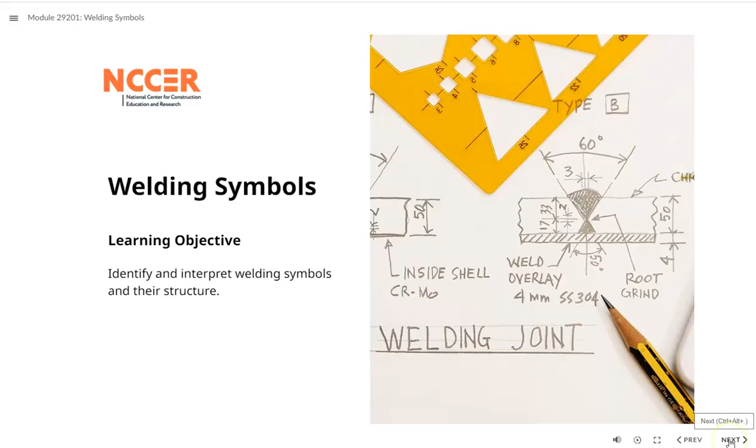Drawings and project specifications contain a variety of symbols that must be accurately interpreted by welders in order to meet the design specifications. The basis for interpreting these symbols is an understanding of welding symbol construction. First, it's important to understand the difference between a welding symbol and a weld symbol.

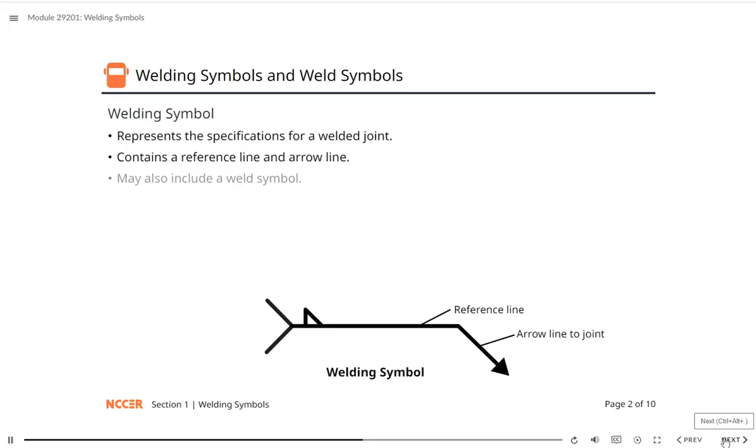A welding symbol, as shown here, is a symbol that represents the specifications for producing a welded joint. Notice the horizontal reference line with an arrow line at one end. The arrow line, which can be on either side of the reference line, points to the location of the weld. Many welding symbols will also include a weld symbol. A weld symbol indicates the weld type. It is connected to the reference line of the welding symbol.

The welding symbol also contains information on the size of the weld, as well as its surface finish. The tail of the welding symbol is where additional information about the weld can be found, such as the welding and cutting process, or which electrode type to use.

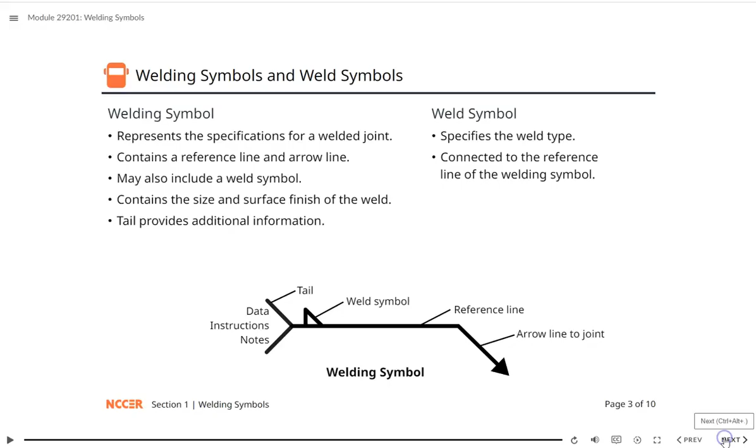Let's take a deeper look at some symbols for welds, the location of weld symbols, how combining weld symbols works, and how to interpret multiple reference lines. Select each item to learn more. There are 5 basic types of weld joints: butt joint, corner joint, T-joint, lap joint, and edge joint.

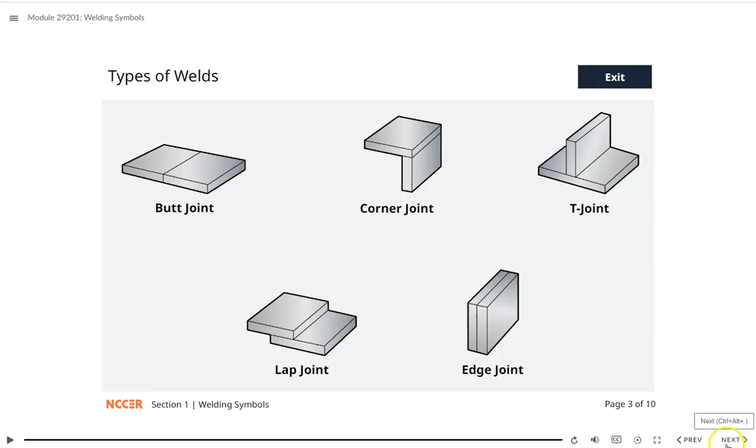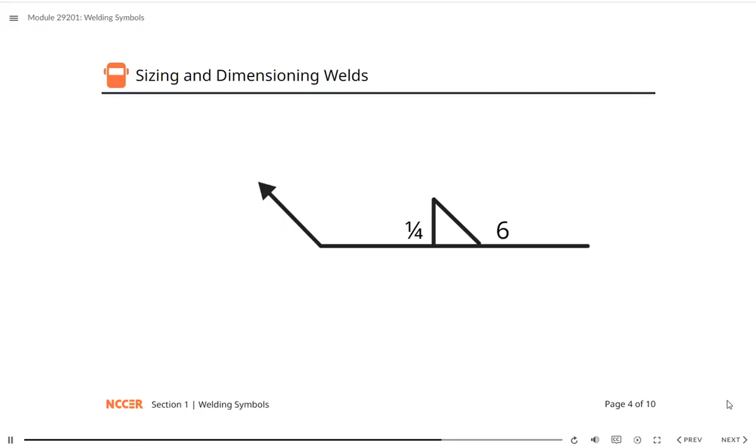Dimensions of welds are found on the welding symbol. Size data is found to the left of the weld symbol, and the length of the weld is found to the right of the weld symbol. Dimensions can be represented as fractions, decimals, or metric measurements. Select each weld type to learn more about the sizing and dimensioning of each type of weld.

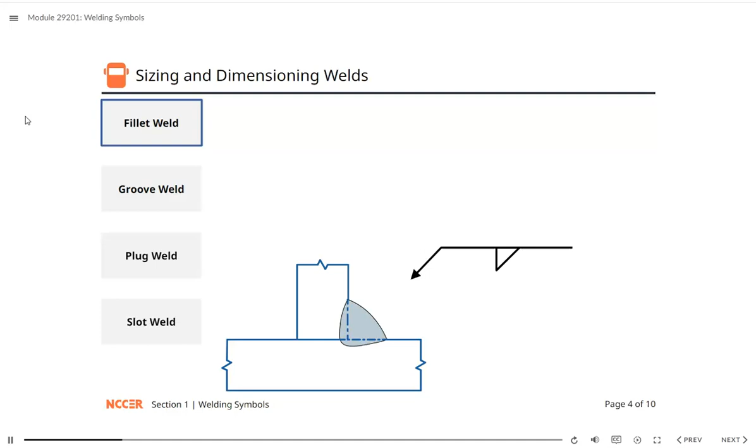A fillet weld is a type of weld made in a corner. It joins 2 perpendicular welding surfaces and is triangular in shape. The size of a fillet weld is determined by the length of the legs or sides of the largest triangle that can be drawn within the fillet weld cross-section. Typical fillet welds have equal-sized legs, so only one size will be given. The size is placed to the left of the fillet weld symbol.

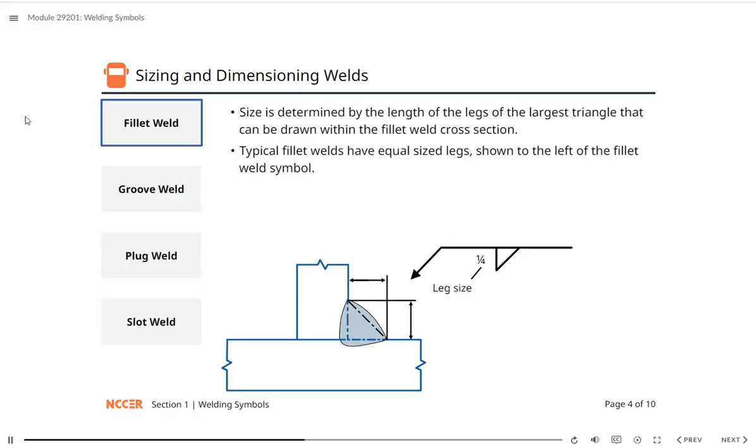For fillet welds with unequal legs, the size of each leg will be placed within parentheses or brackets to the left of the fillet weld symbol, with a drawing or explanation included regarding leg orientation. The dimension or length of a fillet weld is shown to the right of the fillet weld symbol. Intermittent fillet welds will be shown with a dash between the length of each segment and the pitch, or center-to-center distance between welds.

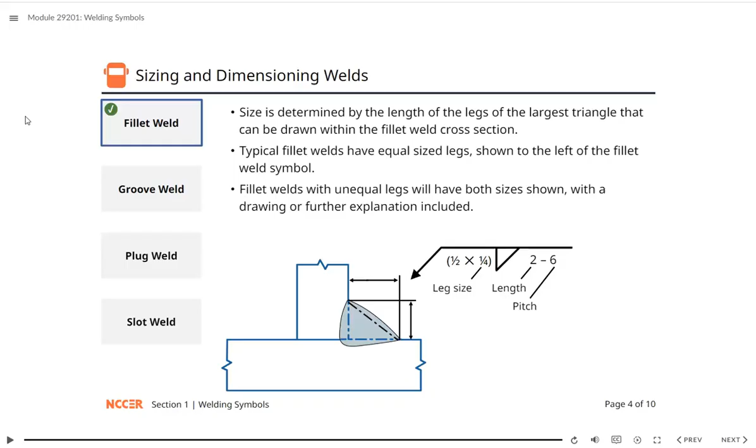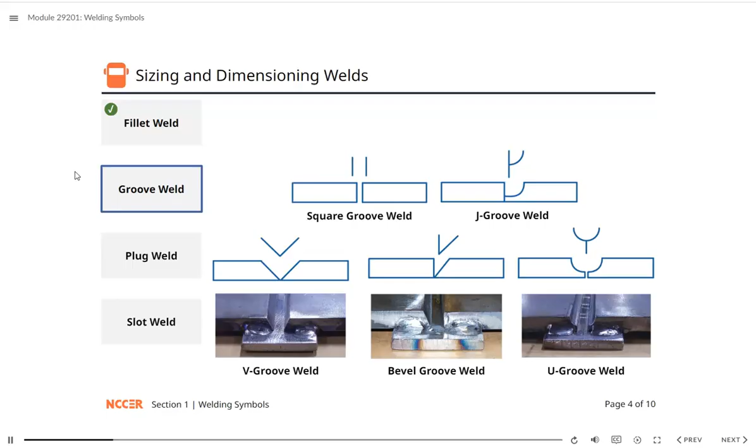Groove welds are made in the groove between 2 pieces of beveled metal. There are several factors to consider when sizing all types of groove welds. Groove preparation refers to how deep the groove extends into the base metal. If the weld extends all the way through the joint, there is no need to show a preparation size. If the groove weld only extends partway through the joint, the depth will be shown to the left of the symbol.

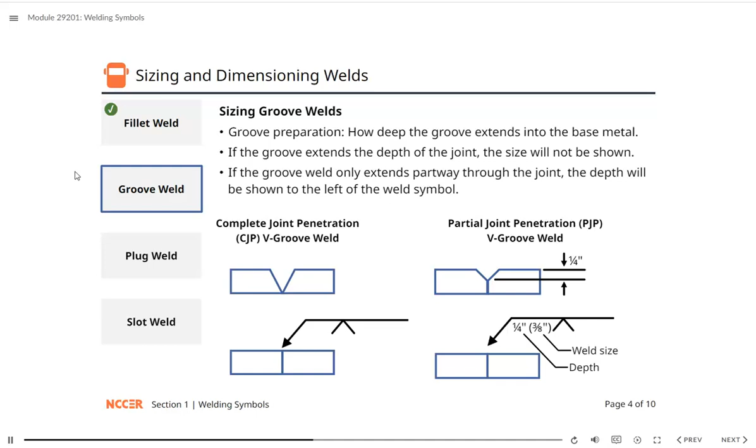For partial joint penetration groove welds, the depth of the groove and the weld size will both be shown, with the depth of the groove shown first and the weld size shown in parentheses. If a root opening is required, the root opening dimension will be found within the symbol. Above or below the welding symbol, the angle for the type of groove can be found. The dimension of the groove weld will be found to the right of the groove weld symbol. If the weld extends the full length of the joint, there will be no dimension shown to the right of the weld symbol.

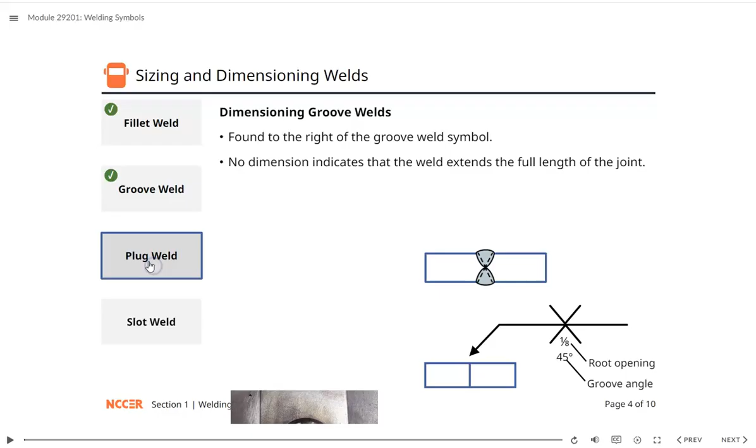A plug weld is made within a circular hole in one member of a joint. It fuses that member to another member. The size of a plug weld is the hole diameter, and it will be shown to the left of the welding symbol after the diameter symbol.

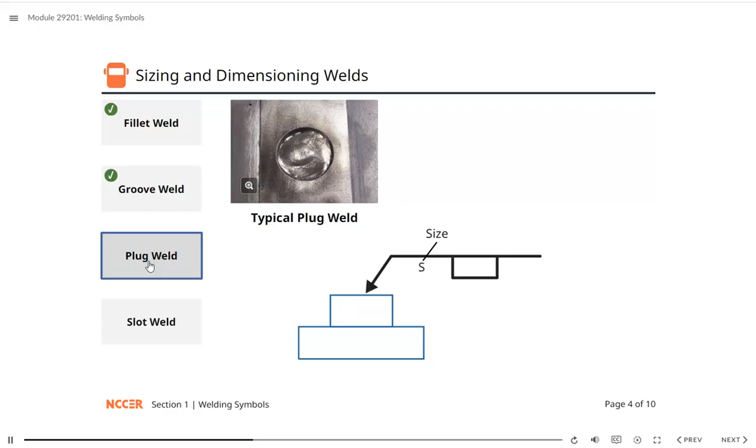The number of plug welds will be found below the symbol, with the depth of fill shown inside the plug weld symbol if it will not be completely filled. If needed, the angle of the countersink will be shown above or below the weld symbol. The pitch will be shown to the right of the plug weld symbol.

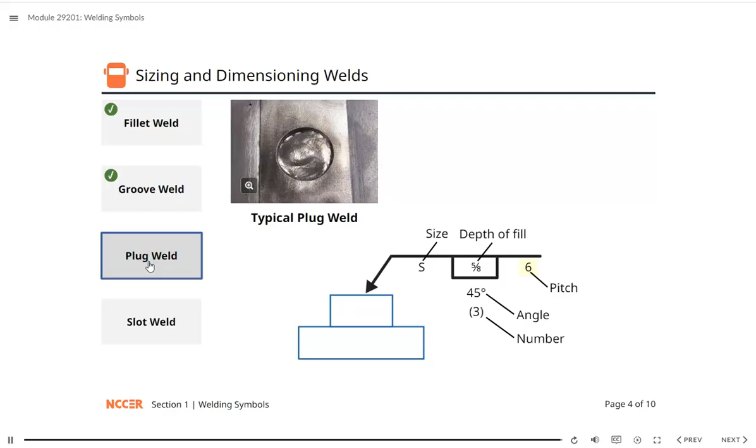Slot weld symbols will only contain a depth of fill number if the slots are partially filled. Typically, the width of the slot will be shown to the left of the weld symbol, and the length of the slot will be shown on the right of the weld symbol, followed by a dash and the pitch. All other information will be shown in a special detail on the print.

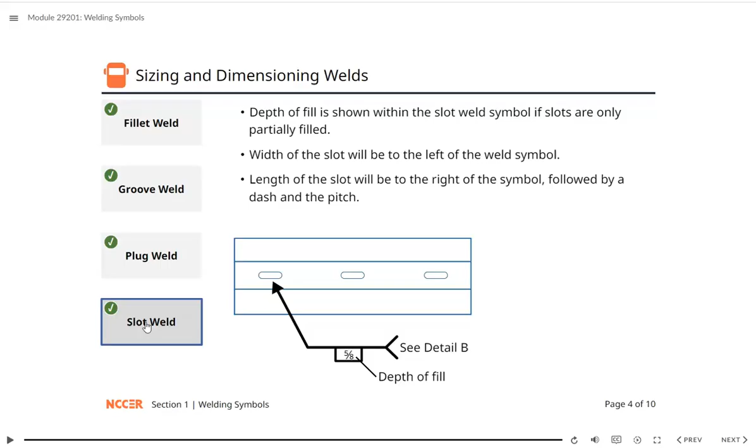Symbols are used to provide special instructions applicable to the welding symbol. The weld all-around symbol is a small circle around the point where the arrow line and reference line meet. This symbol indicates that the weld should extend completely around the joint.

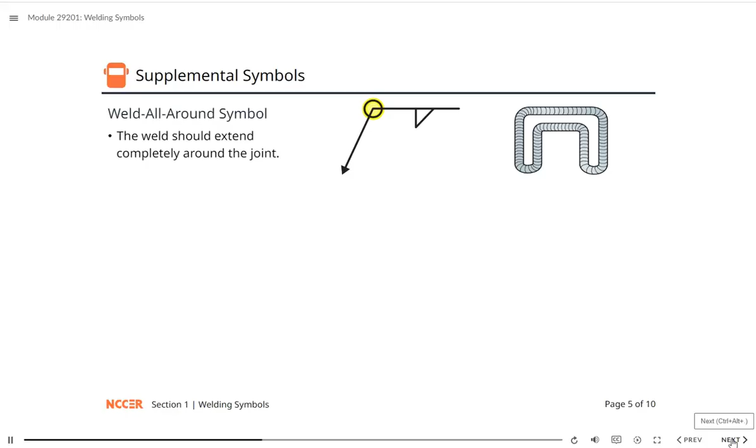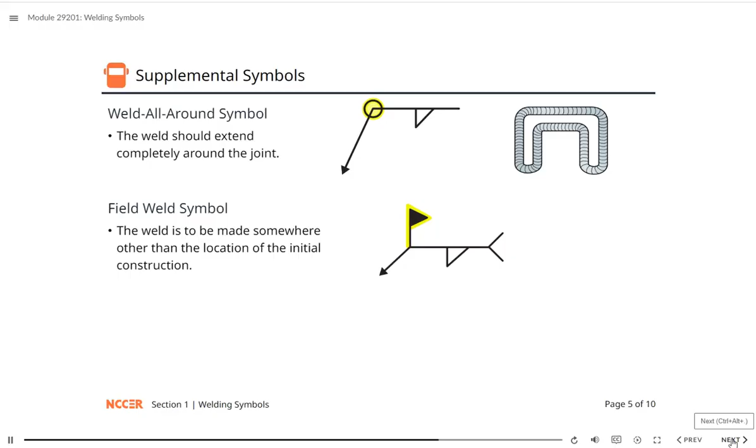The field weld is represented by a small flag at the point where the arrow line and reference line meet. It can point left, right, up, or down. This symbol indicates that the weld is to be made somewhere other than the location of the initial construction. The contour finish symbol is represented by a letter placed next to the welding symbol. Different letters correlate with different finishing methods.

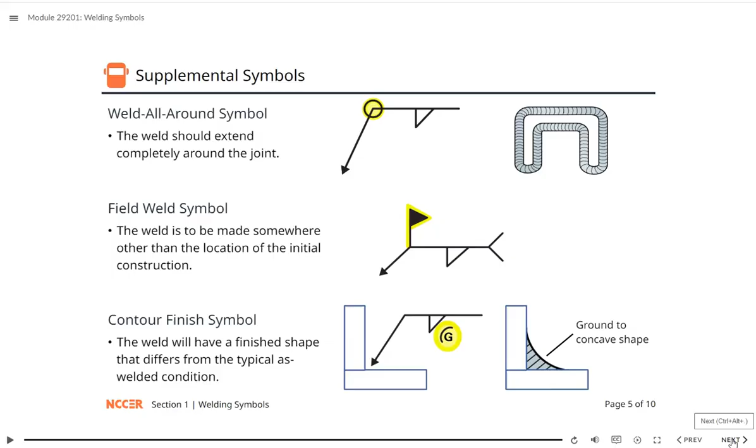Other weld symbols are less common. Backing is used to control melt-through at the root of the weld and can be made of various materials, such as metal strips or ceramic tape. The backing symbol will be placed on the reference line opposite a groove weld symbol. Details about the material, size, and shape of the backing will be noted in the tail of the welding symbol.

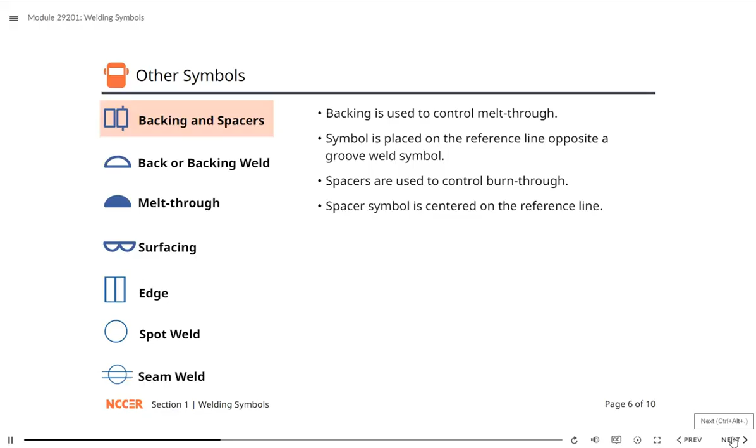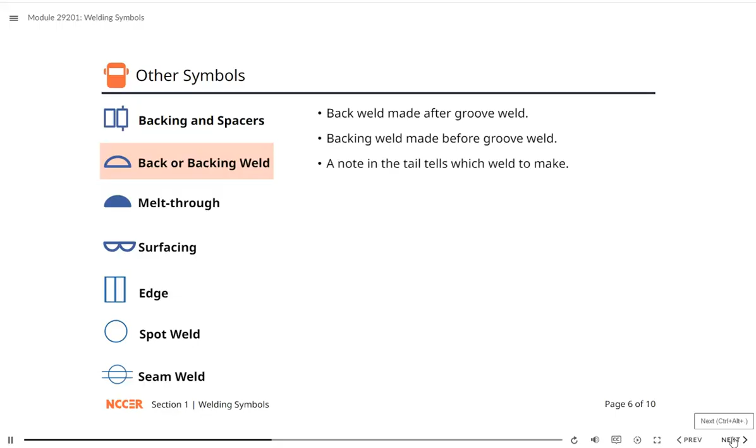Spacers are used to control burn-through at the root of the joint and are most often used with double groove joints. The spacer symbol will be centered on the reference line, with additional notes about the spacer found in the tail of the welding symbol. A back weld is made after the groove weld, while a backing weld is made before it. A note telling which weld to make will be in the tail of the welding symbol.

The melt-through symbol indicates that complete penetration from one side of a joint and root reinforcement is necessary. The amount of melt-through will be found to the left of this symbol. Surfacing weld symbols indicate that weld is to be used to build up a surface. The depth of the buildup will be found to the left of the symbol. According to the AWS, edge welds join the edges of two or more parallel or nearly parallel members.

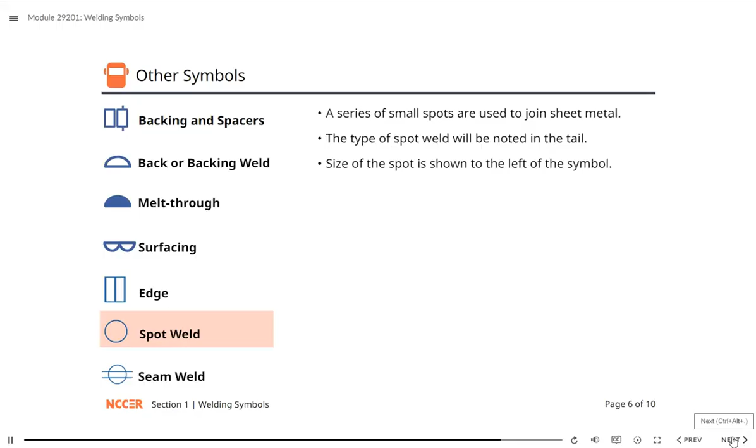Spot welding uses a series of small spots of weld to join sheet metal. The type of spot weld will be noted in the tail of the welding symbol, and the size of the spot will be shown to the left of the spot weld symbol. Seam welding uses different processes to join two pieces of sheet metal in a seam. The specific process to be used will be noted in the tail.